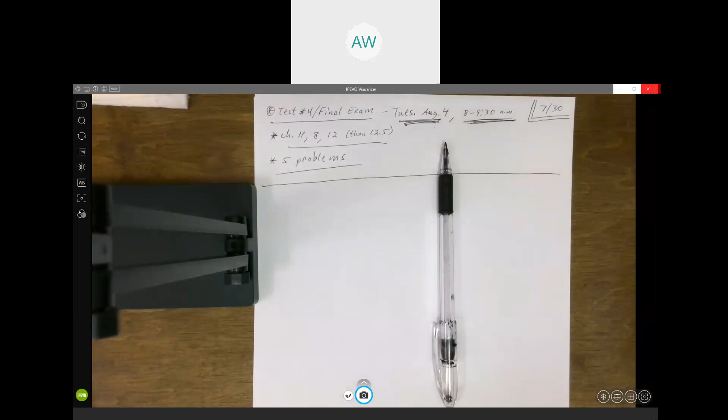The first thing we did since last test was chapter 11, beam design. So just real quick, kind of give you a couple of highlights, remind you of what we did. Again, this was the beam design, and one important thing, hopefully you got when we did this, is that you size the beam to satisfy bending. So you choose the size of the beam so that you don't exceed the allowable bending stress. And if it's a custom design, you're not using one of those standard size beams.

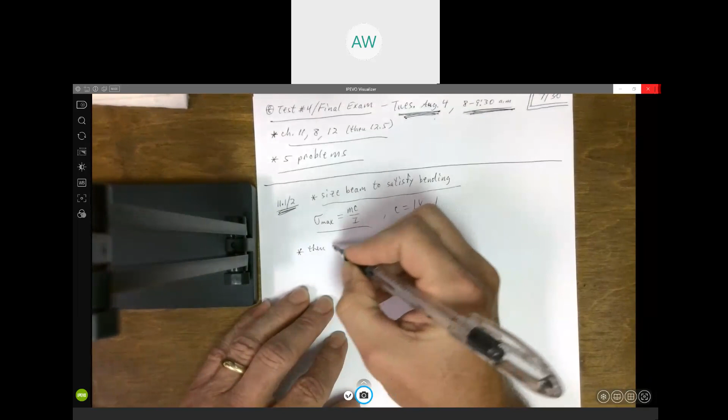Remember maximum bending stress. Use this formula, MC over I, where C here is just the maximum distance you can get away from the neutral axis. That's what the C is here. And so you size the beam to satisfy your bending stress, and then you check to make sure you haven't exceeded the allowable shear stress. So then you want to check if the maximum shear stress for that beam you just chose is less than or equal to the allowable.

Now, a couple of ways we can do that. It sort of depends on what type of cross section we have. If your cross section is rectangular, then again, you don't have to, but you could use this formula. It might save you a little bit of time. 3/2 V over A. If we're doing one of those standard I-beams, right, here's where I told you you could use that approximation.

And so to get tau max for this I-beam, you can just do, again, whatever the maximum shear force is over the area of the web. Right, this being the area of the web. You can do that. You don't have to go through the formal VQ over IT.

Now, if you got something else, then you would have to use the VQ over IT. But as you saw, if you work the suggested problems in the book, most of them are one of the first two types. You either got rectangular cross section or choosing one of those standard I-beams.

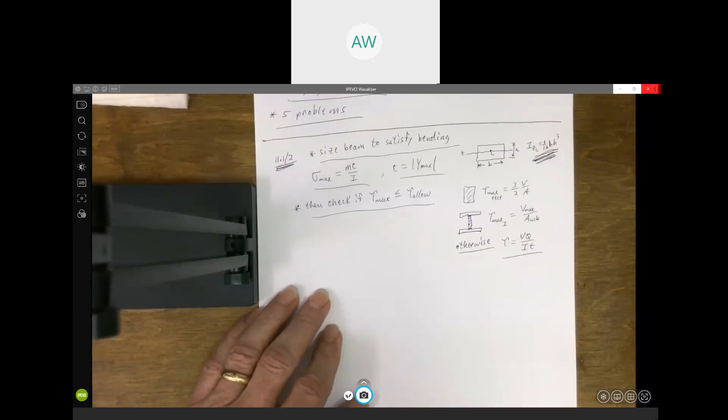Any other shaped area, I would provide you with the table that's in the back of the book, right? But again, if you've been working the suggested problems, you've seen lots of either rectangles or a combination of rectangles, and you should have used this formula a lot by now. That one I expect you to know. Anything else would be provided for you as far as moments of inertia go.

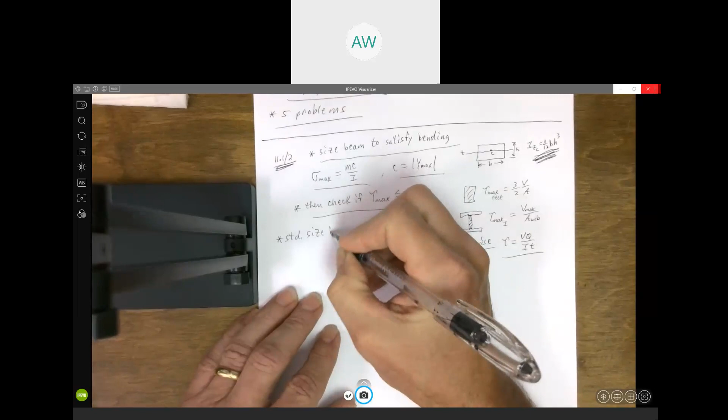And just the last thing I'll mention, if you are doing one of those standard size beams, where we choose a beam from that table, remember we define this thing called the section modulus. So the required section modulus is you just take the maximum moment, divide by the allowable normal stress, and that'll tell you the minimum section modulus you need, and then you go to that table, which is in Appendix B. That'll be provided to you, and you would, again, select the beam that has a section modulus at least this big.

But to be good engineers, remember we're choosing the lightest one. So that's not always the one closest to that required section modulus. You might find a little bit bigger, stronger beam that actually weighs less. And so if that's the case, that would be the better choice.

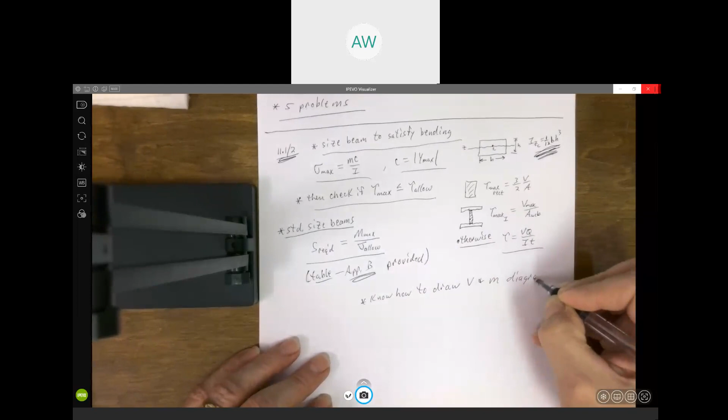And of course, to get your maximum shear force and maximum bending moment, maybe should have started with this, but you got to know how to draw shear and moment diagrams. So to some extent, chapter 11 here, basically you got to know how to do the stuff from chapter 6 and 7 to do this. So it covers a good bit about beams and bending stress and shear stress.

So maybe before we go any further, if somebody's got any question you want to ask related to beam design, then we can go ahead and address that here. Everybody good with beam design then? All right, well, we'll move right along. We might get through early today.

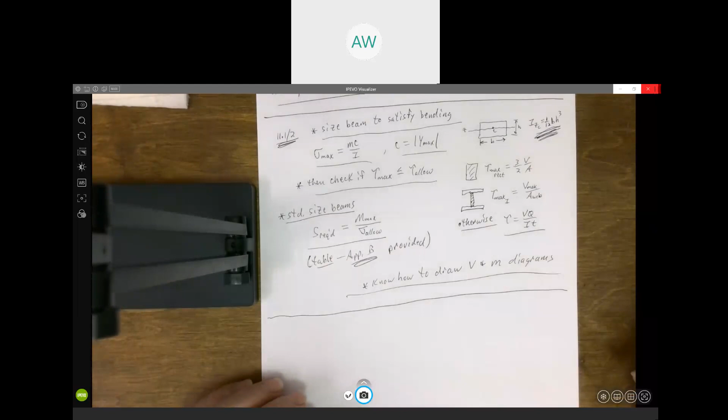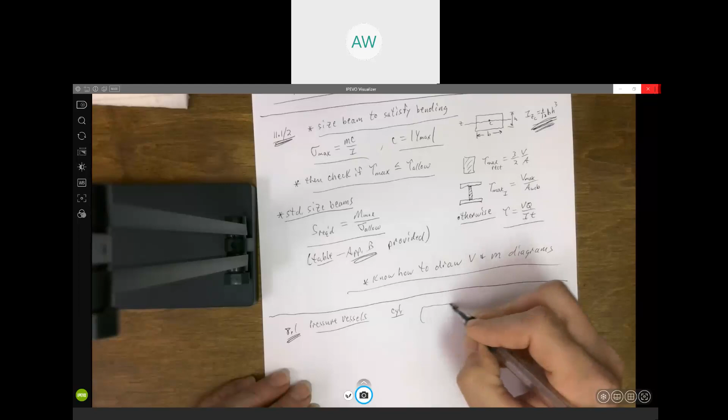The next topic, I suspect most of you probably are good with, and that was, we went to chapter 8, and that first section of chapter 8 had to do with pressure vessels. And we looked at two. We looked at a cylinder. If you got a cylindrical shaped pressure vessel, we saw we had normal stress in two directions, the axial direction and what we call the circumferential direction, or for short the hoop stress. And so we came up with these formulas.

The normal stress in the axial direction, sigma A, was PR over 2T. The hoop stress was just PR over T. And note here, the hoop stress is twice the axial. My A doesn't look real good. All right, so the hoop stress being twice what the axial is, if you're designing a cylindrical vessel, the hoop stress is going to govern and determine the design of that tank, because again, that stress is twice what the axial is.

All right, so the other shaped vessel we looked at was a sphere. And for the sphere, it was nice because of the symmetry involved. The normal stress in the two directions are the same. So the normal stress in a spherical shaped pressure vessel is the same as the axial. It's PR over 2T. So those formulas you need to know for normal stress in a pressure vessel. Any questions anybody have related to pressure vessels?

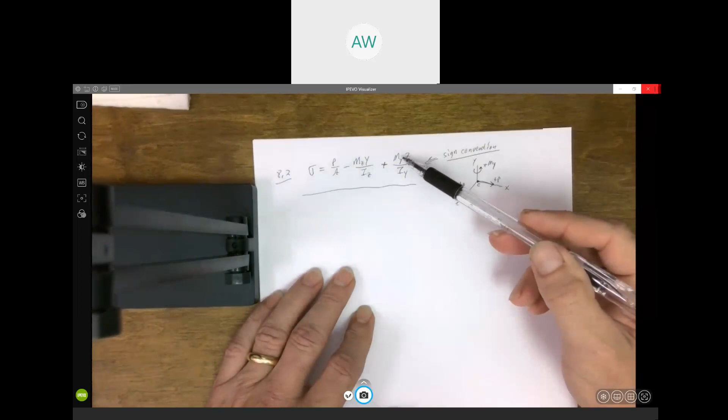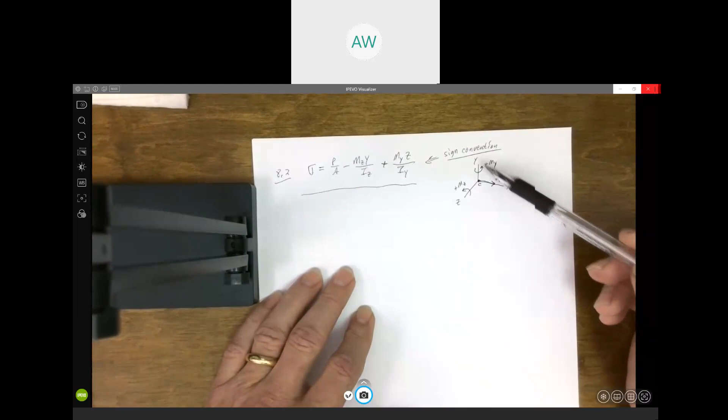And then similarly for the y-axis, a positive moment about the y-axis would be a moment that bends it in that direction about the y-axis. Again, based on right-hand rule, thumb in the positive y, direction your fingers go is the positive moment. So if it's in that direction, you'd plug in a positive My there. If it's in the opposite, you plug in a negative. And then again, y and z, if it's in the positive z direction, you'd put in a positive z. If it's over here in the negative z direction, you plug in a negative number. That's a good way to do it.

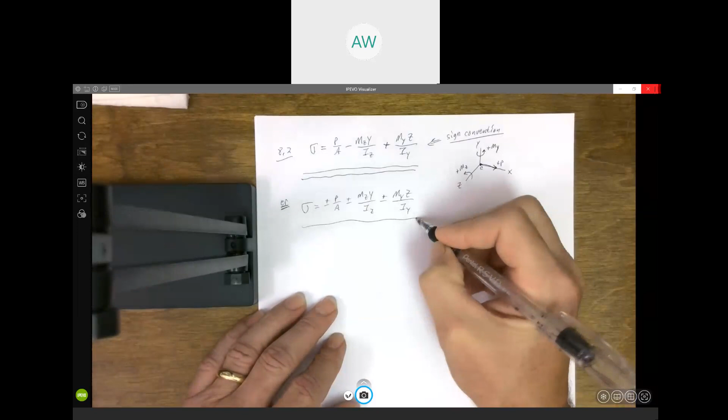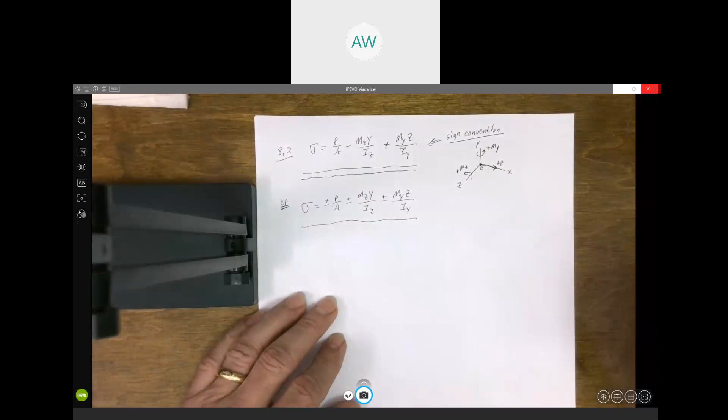I did mention that if you don't like going through the formal sign convention, and you can actually see what's going on, and a lot of this is personal, like some people see and visualize better than others. But I told you that it was also acceptable if you wanted to not use the formal sign convention, and just think of it as plus or minus each of these terms. And you're just going to put in plus or minus based on whether that force or either one of those moments is causing tension or compression at that point that you're calculating the stress.

So again, here, plus or minus would be based on, is it tension or compression at that point? And you're just going to enter the magnitudes for, again, the y, the z, Mz, My. Right? You're not going to assign a formal, is this in the positive direction, negative direction? You're just looking, the direction that moment's acting, is it causing tension or compression? And you just put plus or minus based on tension or compression. Either way works.

Again, hopefully, if you've been working some of these problems, you've figured out which way makes sense to you. And what I would say is go with it. If you can look at it and easily tell, oh, well, that's tension, that's compression, and you want to do it that way, that's fine. But if you get confused or you're not confident in that idea, then use the sign convention. Okay, use this and plug in the plus or minus for the moment or the y or the z, and you'll get the right answer that way.

All right, that's basically what that section involved. You had members that were being subjected to an axial load P, as well as being subjected to moments, either about the z-axis, the y-axis, or both axes. So that's about all you got for this section. Any questions related to combined axial and bending?

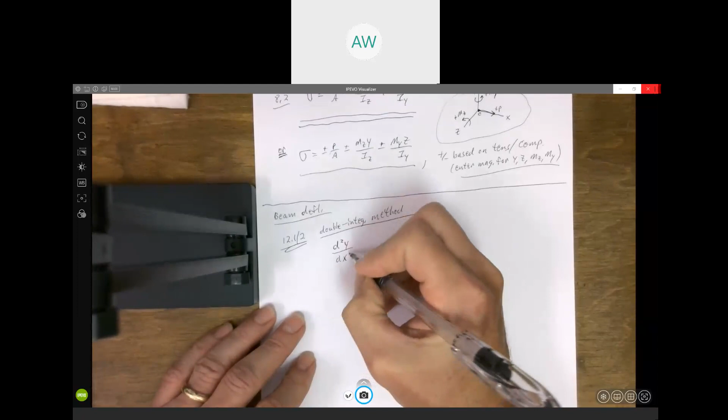And the first thing we looked at was in the first couple of sections in chapter 12. This is where we looked at solving these using what's called the double integration method, which basically was using the method of sections to go out to some arbitrary location x along the length of the beam, cut it, determine what that internal bending moment was as a function of x, and then you take that moment function and you put it in this differential equation.

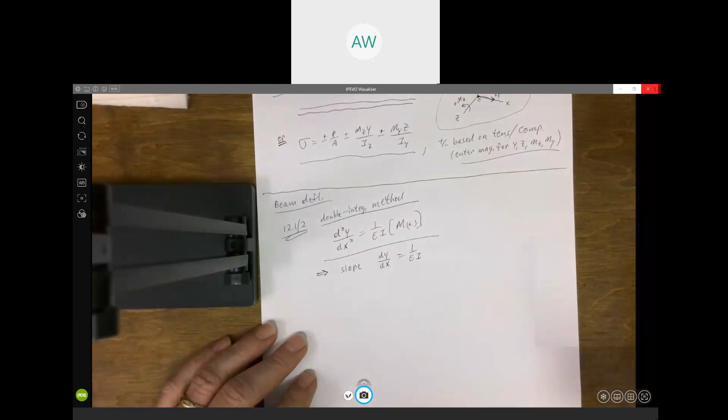And then, in order to solve that differential equation, you just had to integrate twice. You integrate the first time, it would give you the slope or the angle. You'd have dy/dx is equal to 1 over EI. Remember, we're assuming E and I are both constant, right? So we can always pull them out. We don't have to integrate those. But don't forget to put them on there. I see students all the time leave that off and just integrate the moment, and it's wrong if it doesn't have the 1 over EI there. But you just integrate that moment, and then you'll get a constant of integration. That'll give you the equation for the slope.

You integrate again, you'll actually get the deflection or the displacement, or the equation of the elastic curve, as he calls it. So whatever you got when you integrated, just integrate it again. The constant, when you integrate with respect to x, you just get the constant times x, and then you'll get a second arbitrary constant of integration.

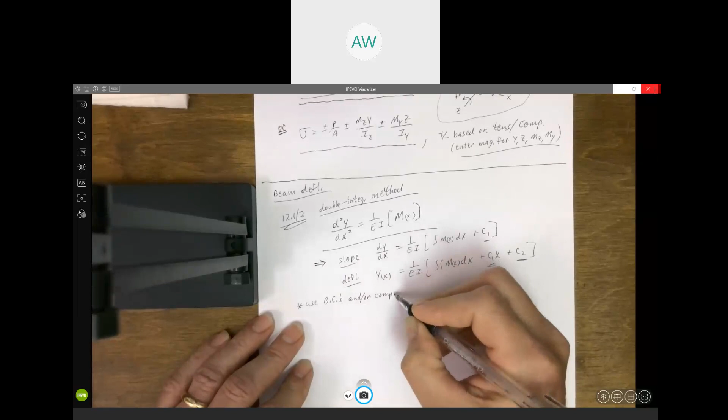And then it's a matter of using your boundary conditions and possibly, if necessary, the compatibility condition to solve for these constants of integration. So you just use your boundary and/or compatibility conditions to solve for your constants.

And our boundary conditions here are the fact that if you have a support, it prevents it from moving. So you know the deflection, or y would be 0 at that x value. If you've got a cantilever beam, you've got a fixed support, right? It prevents it from rotating, so you would know that the slope would be 0 there, and you could set the slope equal to 0 at that particular x value and solve for those constants.

Now, that last example we did in this section, we had to cut it twice, because remember, if the load changes, your moment equation changes. So you'd have to get a second set of equations, and that's where the compatibility would come in: where those two sets of equations meet, they would have to give you the same values for slope and deflection, right?

But that's the process. Some turn out to be longer than others, but you approach it the same way every time. Do method of sections, get your moment equation, integrate it once to get slope, integrate it again to get deflection. Just don't forget to put your constants of integration. I see those get left off quite frequently. Any question about getting beam slope and deflection by using the double integration method?

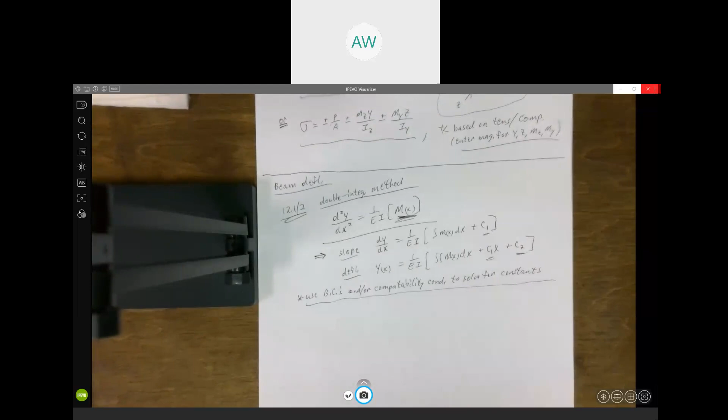I'm not real inquisitive today.

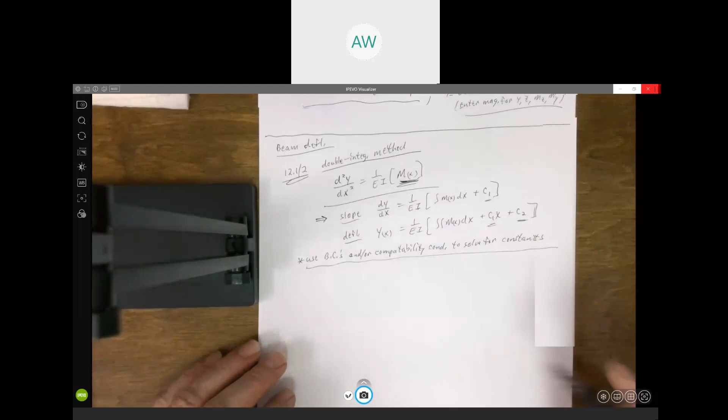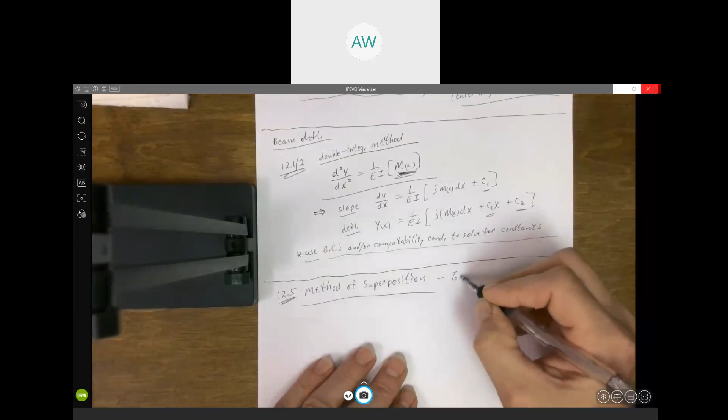So the last section, what we did yesterday, hopefully you thought was pretty easy. This was where we did the method of superposition, and that's where we used that table. That table, I think that was Appendix C. Yeah, that's Appendix C. That will be provided to you.

So here's where you got a beam with more than one load acting on it. And you just break it up and you get the slope or the deflection due to one load, get that from the table, and then you get the slope and/or the deflection from the second load from the table. If you got 3 loads, same thing. And then you just add those together. And so whatever the slope for load 1 plus the slope for load 2 will give you the slope for the 2 combined. And same thing for its deflection.

But that table is provided. Just be careful. Remember, the table uses V and I used Y. So I don't know if you've been using Y or V, but just be aware of the notation difference. And also in that table, most of the loads, the forces are acting down. And so the positive deflection is up. So you see a lot of negative signs.

But if you had the exact same load, but it was acting up instead of down, you just change the sign to a positive, right? Because it's going to cause it to deflect upward instead of downward. And positive Y is up. Any question about superposition, what we did yesterday? That's it. That's 5 things we did since the last test. You're going to have one problem from each of those on Tuesday.

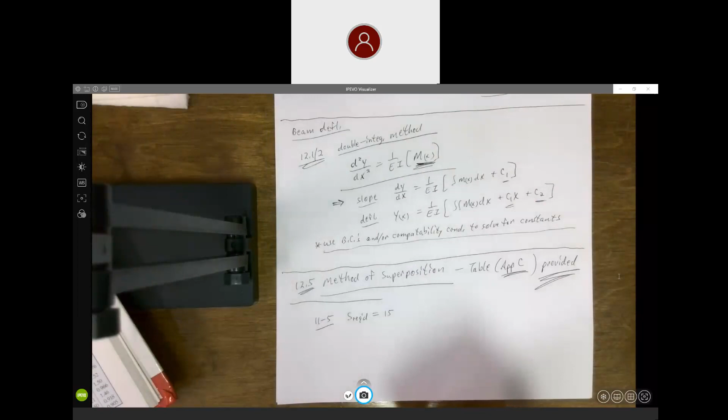I gotta find it. Appendix B. These are English units. Okay, so hang on just a second. And this was 11.5. All right, now tell me, what was the required section modulus that you calculated? It was 15, I believe. I couldn't hear you. 15? 15. So this was 15 inches cubed. Yes, sir. All right.

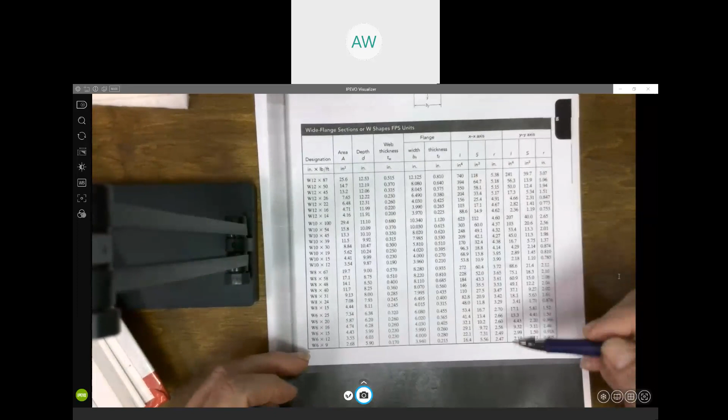So let's see. I think I have a copy. All right. So yeah, here's a copy of the table. These are English units, and so this is starting with the little beams, right? When we did this, we were wanting the lightest one, so I would start with the smaller ones and go up rather than start with the biggest, heaviest one and go down.

So we're looking for S required here of 15 inches cubed, right? So we're not necessarily going to choose the one that's closest to 15. We want to get one as close to 15 as we can, but we might find one that's a little bit lighter, that's a little bit bigger than the one closest to 15. So I would start here and go up till we find one that's 15. So this is a 16.7, so that would work, right? But that thing weighs 25 pounds per foot.

So let's go to the next group and see the first one of those that's bigger than 15. That's 20.9. It's only 24 pounds per foot. So even though this S is closer to 15, this is the better beam, right? Because it's 1 pound lighter. That means it's cheaper. Now that may not be the best one. Let's go up to the next size, the W10s. And here we got a 10 by 19, right? It only weighs 19 pounds per foot. That's better than 8 by 24.

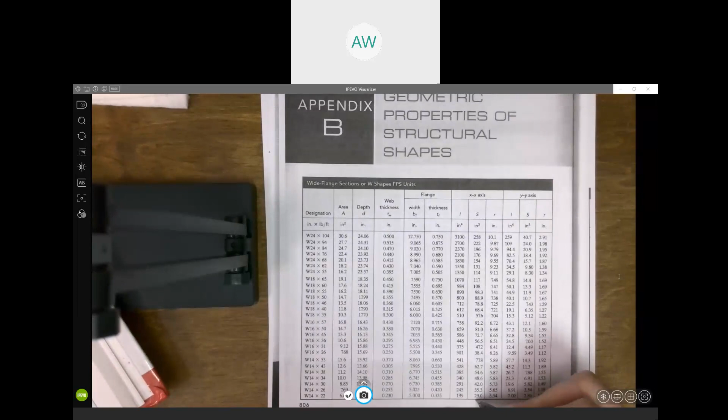And if we go up to the next size, I got a 17.1 is the first one bigger than 15. That one's close, 14.9, but it's got to be at least 15. And so that's W12 by 16. Now that's even lighter than 19. That's even better. So on this page, that would be the best choice. Now let's see if we go to the next bigger group. We're getting to bigger beams now, but here 29 is the smallest one. That's much bigger than 15, but it weighs 22 pounds per foot.

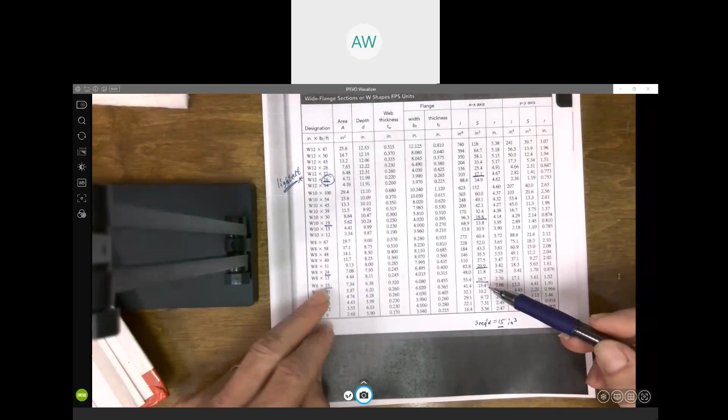So I know that may have been cut off the bottom. Okay, I think I understand. I was trying to get the one closest to the S value that I found, and I was testing it and making sure it would work. Right, that makes more sense then, because that's the lightest. That's the one you want to choose. Because yeah, this one is closer, but it weighs 9 pounds more per foot. So it's going to cost you a lot more money. So any question about that?

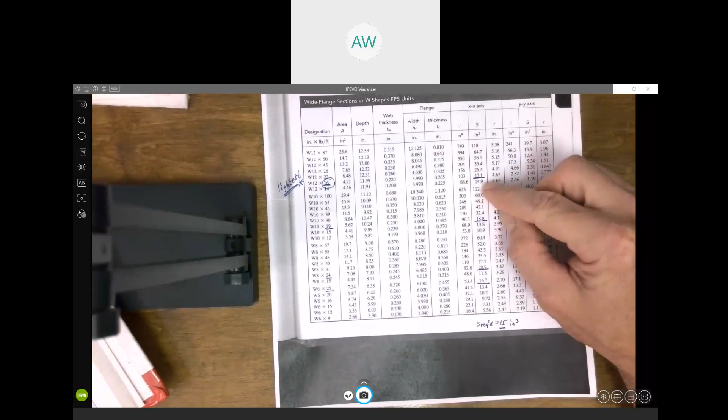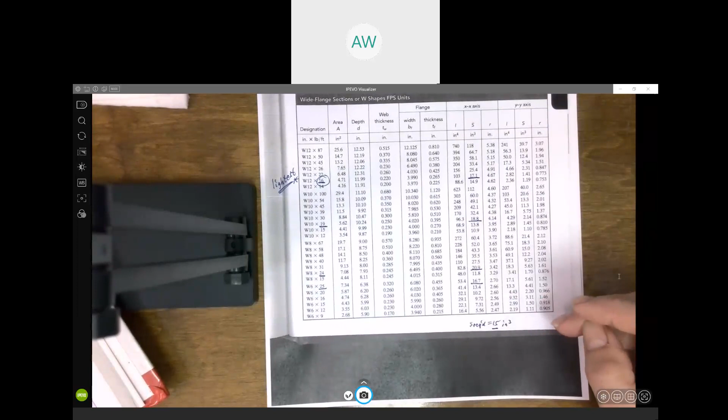So it has to be at least equal to the S required or bigger. It's got to be at least 15. If that was our required, it's got to be at least the required. That's why this one was really close, but not quite. Yeah, you're almost never going to find one exactly. And that one is about as close as you ever get, but it's just less than 15. So if you chose that one, even if you didn't include the weight of the beam, your normal stress would come out just larger than your allowable. You always want to choose one at least as big as required, and then of those, pick the lightest one.